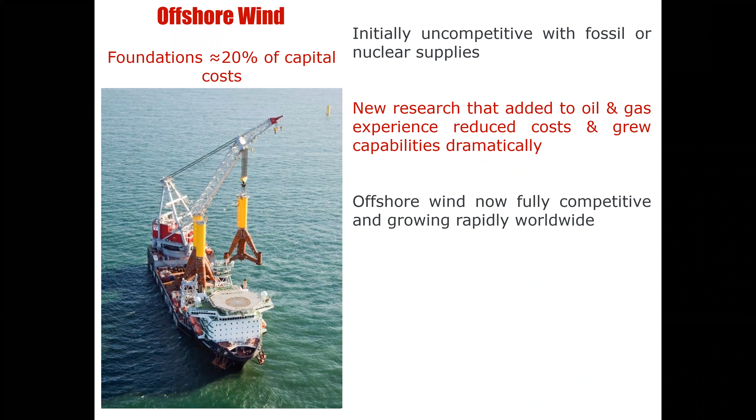Now, the UK has led the way on this in terms of market share. We have the largest capacity installed in the world, about 25% of the total, and that's allowed us to reduce our coal generation massively. And if you've been watching the news from Glasgow with COP26, you'll see this is a major achievement. The UK, which is almost built on coal, now only gets 1.7% of its electricity from coal, and the plan is to stop this completely within 3 years. And of course, this is very good for the environment.

Now, wind turbine foundations really depend principally on the geomaterials and the water depth and the ocean loading and where you are in the world with regard to regulation regime. We have in shallow depths many monopile foundations. As we go into deeper water, we have jacket foundations, miniature oil rigs. And as we go deeper still, we have floating structures. I believe at the moment the UK has the only operational floating wind farm, but they're likely to become much more common around the world in the years ahead.

So for monopiles, we get lateral loading. For jacket piles, they principally work in push-pull to take the moment supplied by the wind and waves. And in all cases, we're concerned with ultimate conditions and also initial loading response, which governs the cyclic behaviour, and that really depends on the small strain behaviour of the geomaterials present.

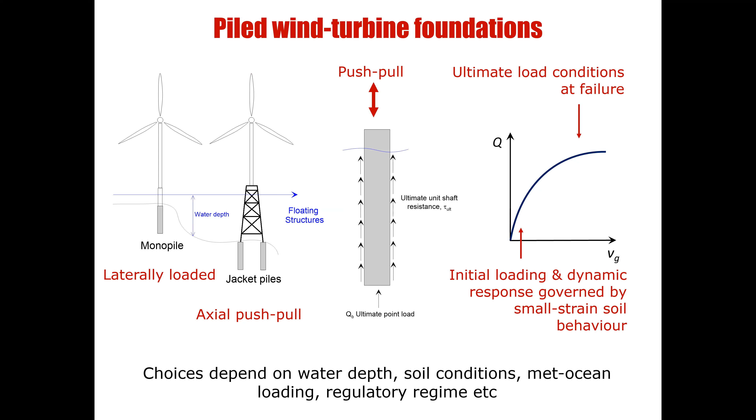How can we aid design as geotechnical engineers? Well, come up with new ways of calculating and predicting load displacement and ultimate capacity for offshore wind. We've done this by combining advanced element testing, numerical and physical modelling, and also field monitoring. And keeping in touch with what happens in the field with real wind farms has been very important to exploring the questions that are posed by field observations.

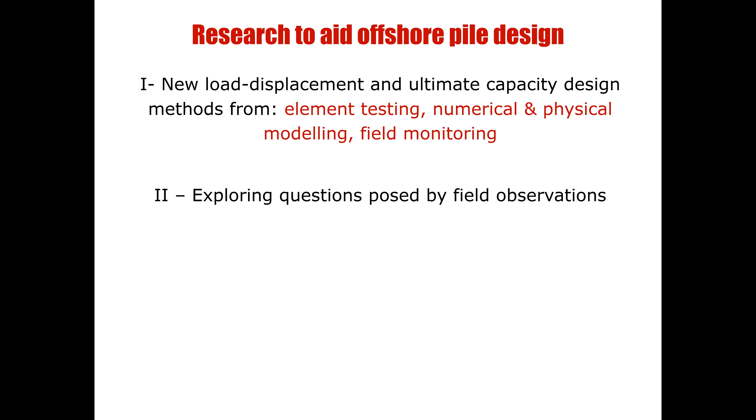So we have multiple challenges, and around the world I've been trying to meet these in Europe and now Asia, USA and elsewhere, hopefully Brazil. So we're going to talk first about monopiles and then move on to floating and finally jacket structures. With monopiles, their operational response is controlled by stiffness and verticality. The wind turbine operators say that you have to have certain parameters met to satisfy design. And this has been done with these low length diameter caissons quite successfully so far in very large wind farms in Northern Europe.

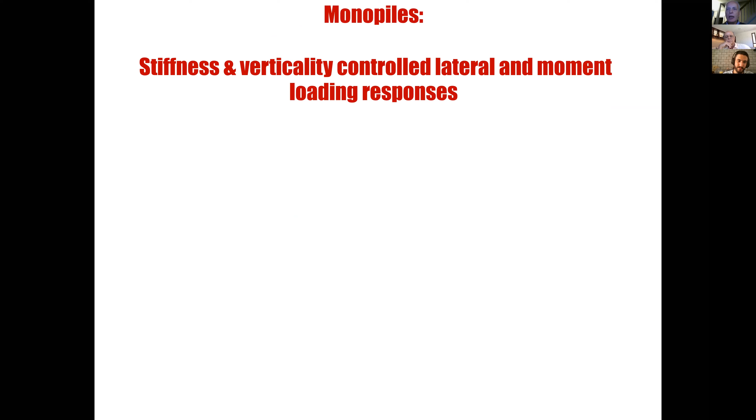What is found, though, is that the field monitoring of the frequency responses of these structures shows that the standard p-y methods that have been used to design, for example, offshore platforms for gas, lead to over-design, over-conservative design in the soils we have in Northern Europe. We saw the same thing, actually, with North Sea oil and gas platform piles, and I'll mention that later. So there's scope to do better engineering, better analysis, and so reduce costs and allow monopiles to go into deeper water and maybe with more challenging geomaterials.

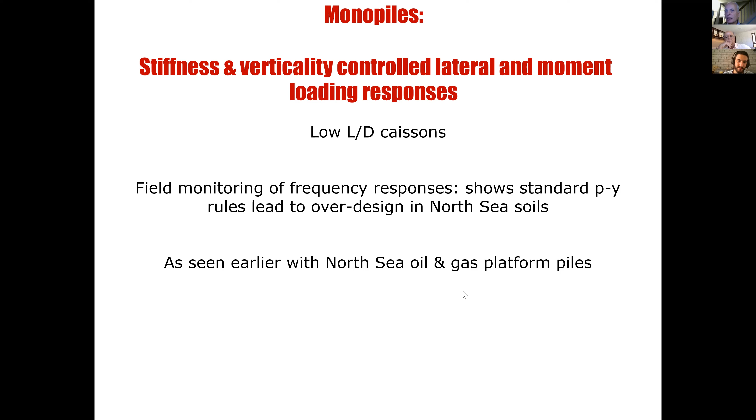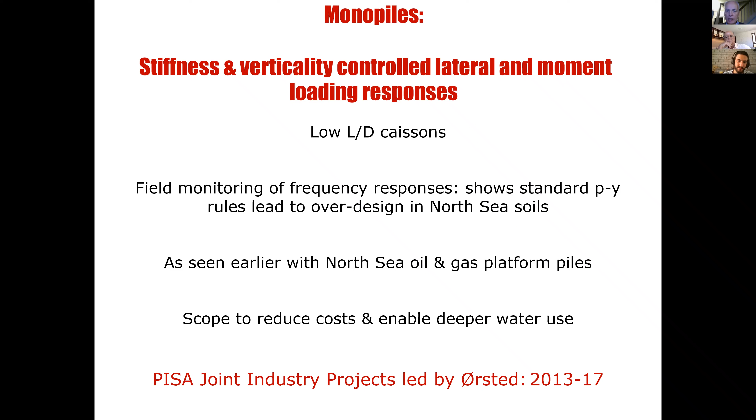Now, our work in this area was partly associated with the PISA project, which was led by Ørsted, the world's largest developer. And we spent about 5 years on this project, PISA 1 and PISA 2. Now, the PISA project was led by industry, but its academic work group, which set the scientific objective, was Oxford, Imperial College, and University College Dublin. And our approach was to come up with methods that were tuned to match the monopile length to diameter ratio, which is much smaller than that for conventional offshore oil and gas piles, to use the regional soils that we find in our area and do intensive testing on those, and also to recognize cyclic action.

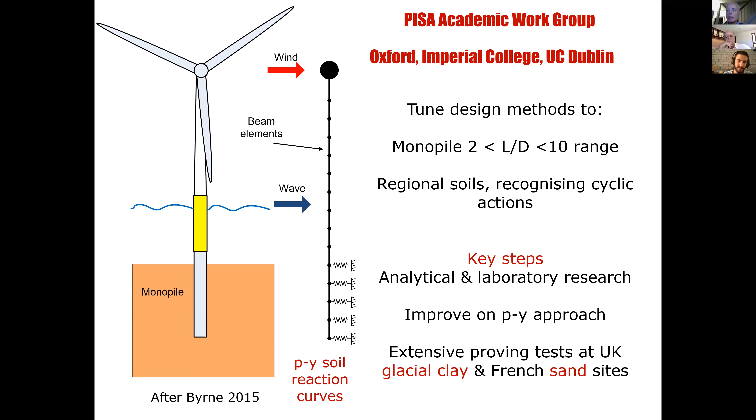So the key steps were starting off actually with numerical analysis and laboratory research. From there, we proposed an improvement on the p-y approach, and then we went to test that with extensive field tests on piles up to 2 meters diameter, at a UK glacial till site and a French sand site. So at each of these test sites, we installed 14 piles. They had 3 diameters, so we could look at scale effects, a range of geometries and wall thickness and so on. And we did both static testing to failure, as well as rate and cyclic tests. And we had lots of instruments on the piles and in the ground. We had comprehensive site investigations, including advanced seismic testing and CPTU testing, plus a lot of laboratory experiments too.

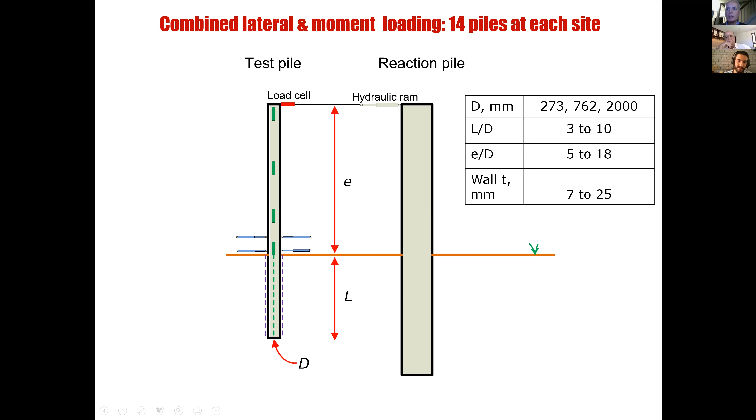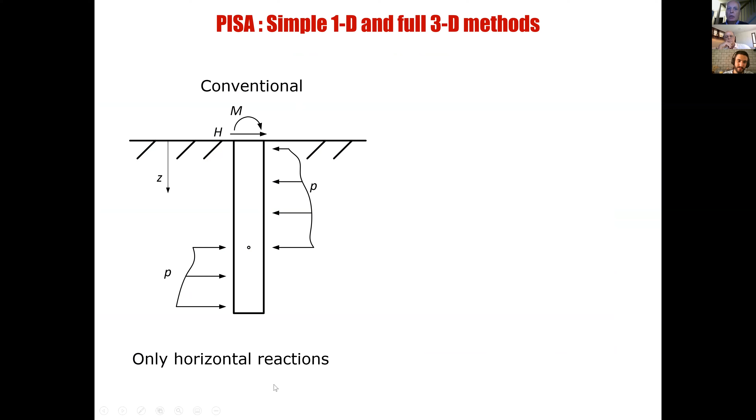Now, the conventional approach to monopile design is to use p-y curves, which provide only horizontal reactions. And the curves, as they're formulated, offer very little opportunity for capturing the details of your regional soils, and they say almost nothing about how to handle cyclic loading. So in PISA, we introduced not only horizontal reactions, but 3 other forms of reaction that contribute to the monopile behavior, which are particularly important with short monopiles. These extra components are distributed side shear, base shear, and base moment. And we calibrated these to advanced finite element models, which were themselves calibrated to stress path tests done in the laboratory. This was part of the work that I supervised, which was done state of the art. And this also recognizes the cyclic loading response.

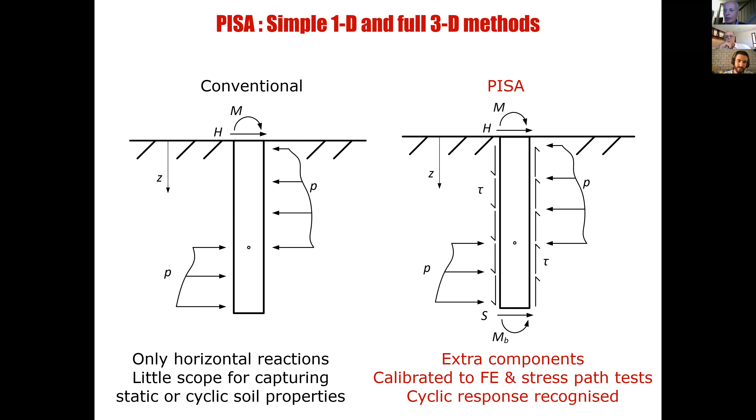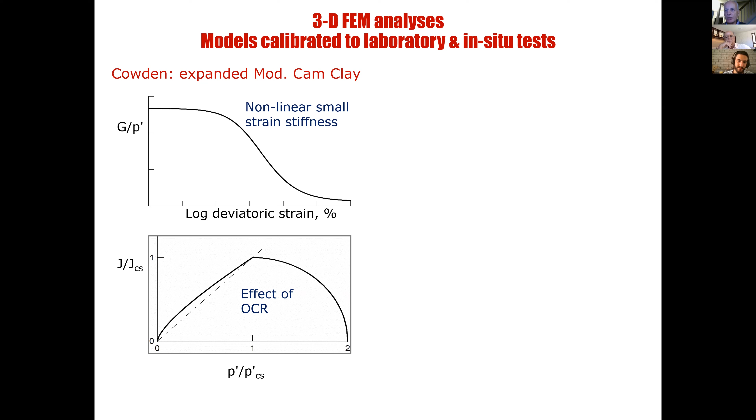So the numerical modeling was done at Imperial College. My colleague and actually former PhD student, Lidija Zdravković, now a famous professor herself. And here we used, for the clay site, an expanded version of Cam clay, which had a very nonlinear small strain stiffness formulation. It recognized the effect of overconsolidated conditions much more precisely than the usual Cam clay or modified Cam clay. And that's really important for the stiff clays that we encounter in the North Sea. And for the sand, we used a bounding surface plasticity model, and we had strength variations in the deviatoric plane, and we had a state-dependent response in the sand. And this work was led by Lidija Zdravković, David Taborda, David Potts, and myself from Imperial College. And that was one of our main contributions, along with the soil testing.

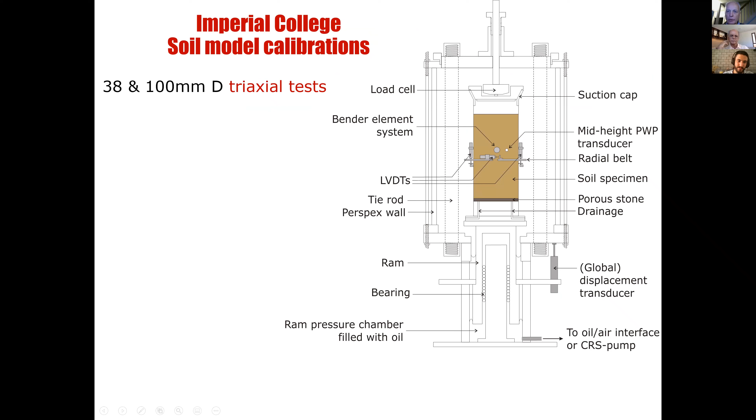And the soil testing was done at Imperial College in our laboratory with advanced equipment. We had 2 sizes of stress path apparatus, very high resolution local strain measurements. We could measure pore pressures at the mid-height of our specimens. We had dual axis bender element equipment. And we also looked at anisotropy with hollow cylinder apparatus. And we could make samples even of glacial till, which contains stones and so on. And this provided all of the parameters necessary to calibrate our models. And it also gave us extensions to go further than PISA to look at things like anisotropy, cyclic behavior, and strain rate dependency. Now, let's look at the importance of modeling the right soils.

In the North Sea, and actually I believe in many places around the world, we find 2 classes of soils, which I'm going to typify here by glacial Bolders Bank till, and Eocene marine London clay. And we're going to look at identical specimens in terms of depth and K0 values and very similar high OCRs. And we're going to look at their normalized stress strain and effective stress path behavior.

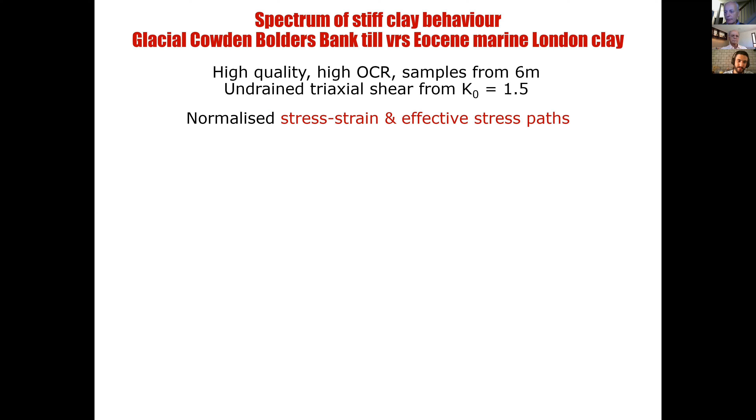So here we have stress strain normalized by initial mean effective stress plotted against axial strain. Now the Cowden till behaves like a critical state material and is ductile and reaches peak strength when it reaches its critical state at very large strains. The London clay, however, forms a shear band at modest strains and then reduces with a very brittle response to much lower strengths. So that's a very important difference.

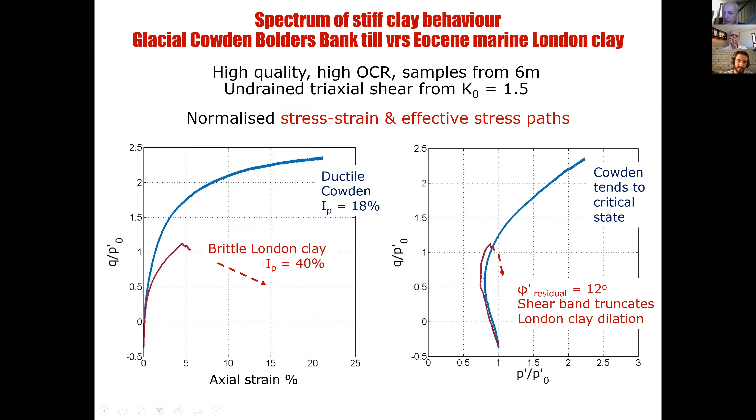If we have a look at this in effective stress space now, q, p', normalized by p'0, the Cowden till dilates as we'd expect for a critical state material, whereas the London clay bifurcates and forms a shear band. And we really need to distinguish these classes of behavior if we're going to model monopile foundations in a faithful way. We also find that the stiffness strain responses of the 2 geomaterials are very different.

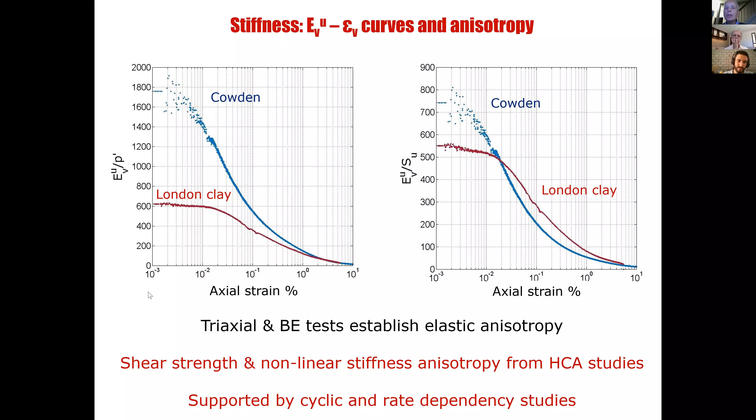So at the moment, for example, I'm involved in 2 major wind farms, one under construction, one under design, where we've applied this approach with site-specific advanced testing and site-specific advanced modeling. And these are multi-billion dollar wind farms at gigawatt scale. So it's entirely possible to do this.

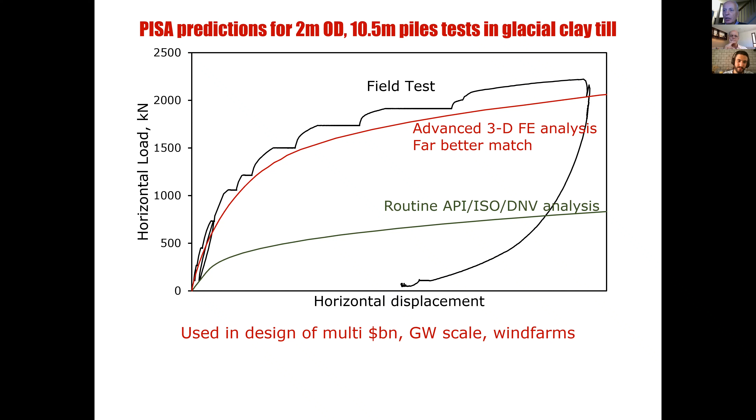And there's further work on the cyclic loading. I'm involved in a project with our friends in China at Zhejiang University in East China, Jiaotong University, whereas my colleagues in Oxford are working with the PICASO project. The PICASO one, which doesn't involve us, involves large tests at the Cowden site and another site, combined with model testing and theoretical modeling. And the idea here is to be able to deal with cyclic modeling for both clay and sand, with pseudo-random and also regular cyclic loading. And there are new models for multi-directional cases and field tests too, I believe. And these are on very large piles, up to 2.5 meters diameter. We have other work going on ourselves with both theoretical approaches and field testing, some of which I'll mention shortly.

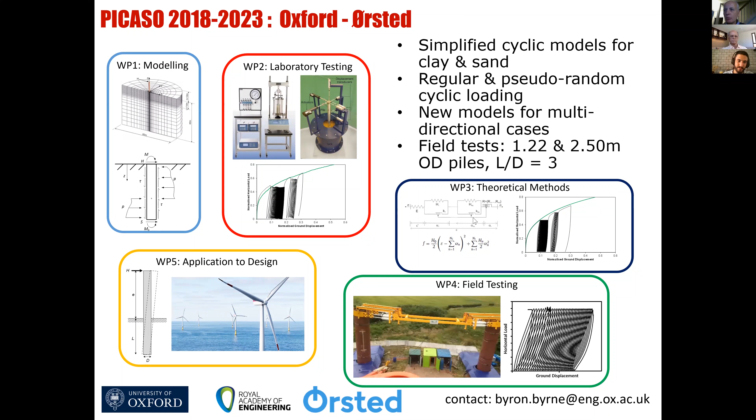Now, the big new challenges are to go from shallow water monopiles into jacket structures and into floating platforms in deeper water. Now, the first oil production platform that employed a floating construction and was anchored to the seabed was the Hutton tension leg platform. And this is now nearly 40 years ago. And I worked on this project and we instrumented these foundations with actually 30 micron resolution in the seabed. And we could see exactly what was happening with the piles at that time.

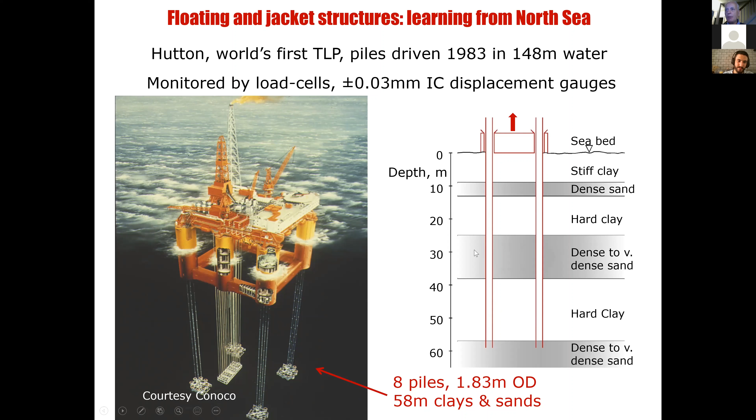And what we found was that when we compared group load on the piles with movement uplift, the conventional analysis, the PY, actually for this case, TZ analysis, but it's the same for PY too, came as shown in green. Our field observations were as shown in blue, and analyses that we made based on stress path testing conducted actually as part of my PhD, and numerical analyses run with my colleague David Potts, showed much better agreement. The standard industry rules are about 4 times too soft. And we found the same with jacket structures, such as Magnus, which at the time I think was the biggest steel structure offshore in the world.

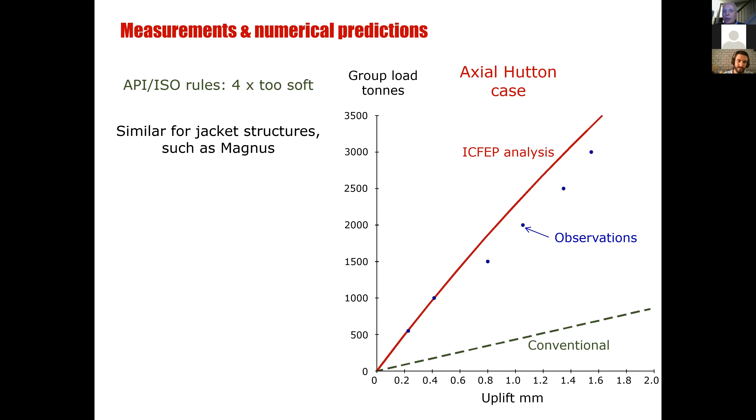So this small strain testing from the lab, combined with nonlinear finite element analysis, gave us very nice predictions. And we've been able to apply that in the PISA project and in many other projects onshore, offshore around the world. But our friends in the offshore industry told us that wasn't really the problem. They told us that they didn't really care too much about load deformation. What really worried them was axial capacity.

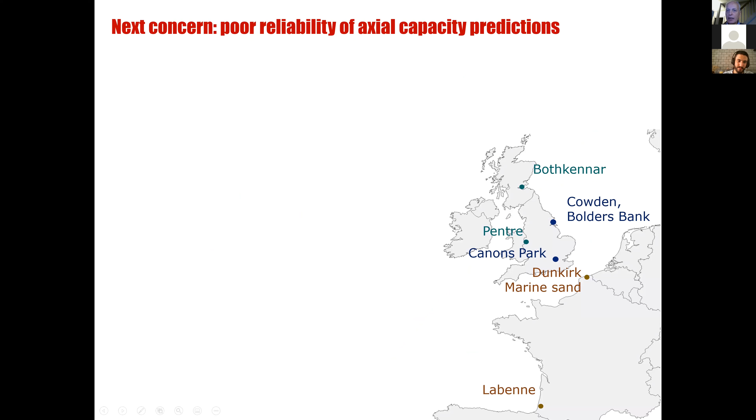So in the 1980s, I set about a research program which went on for more than 15 years, where we addressed the very poor reliability of offshore axial pile design methods. And we noted that at the time, it was considered unfeasible to do full-scale tests offshore. There were some onshore tests on quite big piles, and we took part in those programs, but we went with still smaller piles, which we instrumented very carefully, and we tested these at 6 sites in the UK and France, with clays with high and low plasticity index and OCR, loose and dense sands, and covering this whole range in 3 PhDs, which I'm proud to say all won prizes for the excellent students involved.

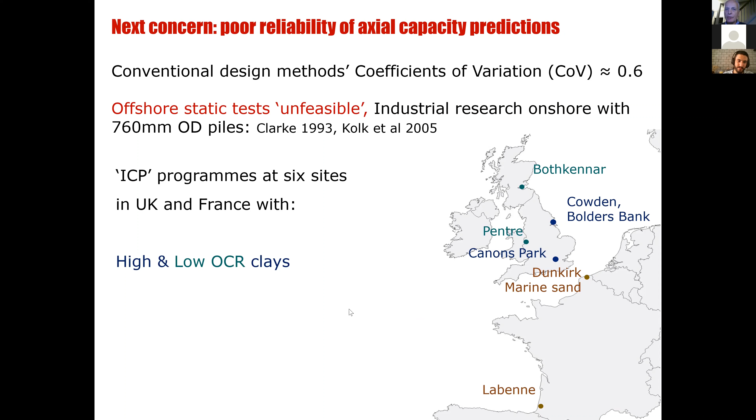Now, the key tool here was our instrumented pile. We could measure with this instrumented pile local shear stresses and radial stresses on the pile surface and pore water pressures, and we could do this during installation, equalization, and static and cyclic loading. What we found was that there was a big missing parameter in pile design methods, and that's the relative depth of the pile tip below any point in question. It wasn't there in any of the design methods, but we introduced it, and it makes a massive difference and explains many anomalies. We came up with new pile design methods, which we call the ICP approach.

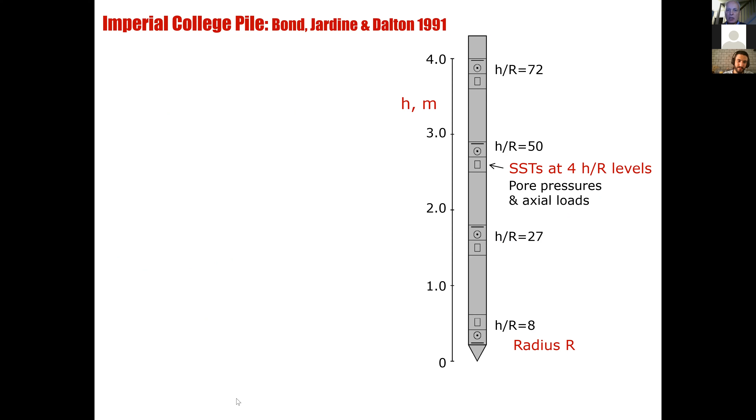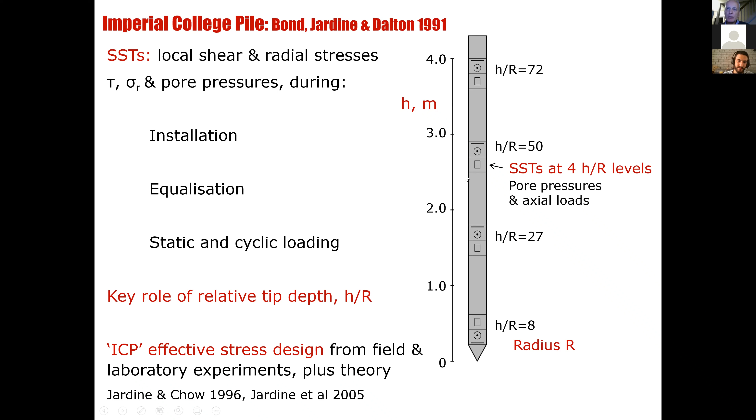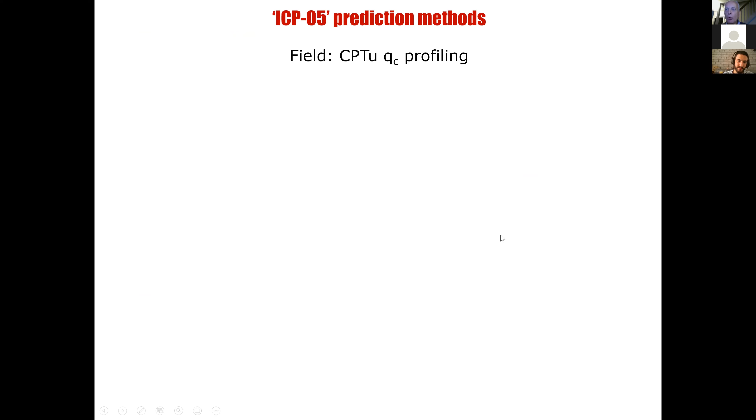We put these first in the mid-90s and updated them about a decade later. We rely critically on high-quality site investigations, with CPTU profiling in the field. In the laboratory, we measure interface shear angles and special tests. We measure OCR for clays and sensitivity, and we link the base resistance directly to cone resistance. Shaft failure, we deal with in terms of effective stress, and we have different expressions for sands and clays. In sands, it's linked principally to the cone, and in clays, it can be linked to the cone, but we normally use laboratory tests. We have a means of using the same expression to cover both closed and open-ended piles,

and we note that as we load a pile to failure, changes occur in the radial effective stresses, which imply important scale effects. The dilatant term here for sands, for example, is inversely proportional to pile radius. So it can dominate the response of a small model pile, but have much less influence on a large offshore pile. And this depends as well on the roughness of the pile.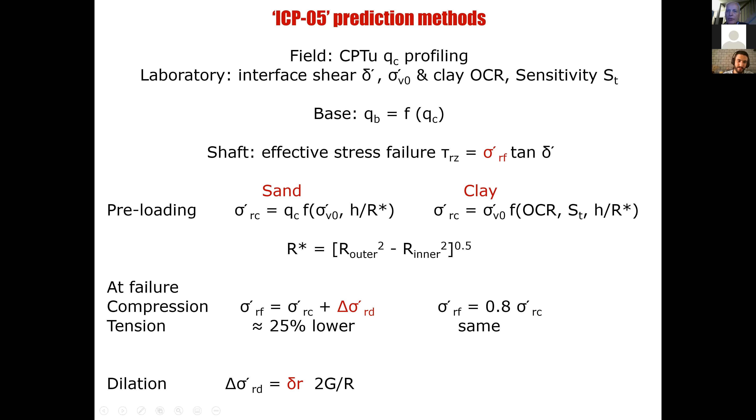Now, we've carried on checking the reliability of the design methods, and recently we did this with colleagues in China, and we gathered data from around the world, including tests in Brazil. And all of these tests met our quality indices for the pile tests and for the site investigations. And we could look at the relative reliability of a whole series of different approaches that might be used in practice. And the ideal is to get a mean between calculated and measured close to unity, and to have a COV as small as possible. And I'm happy to say that the ICP procedure is about the best one. You might argue the UWA one is comparable, or some people might say better, but they're very similar. They're derived from the same basis. Whereas the routine API method has bias and a much worse COV.

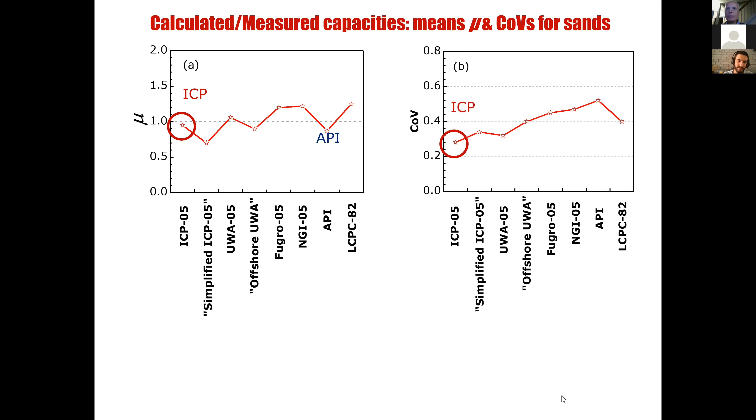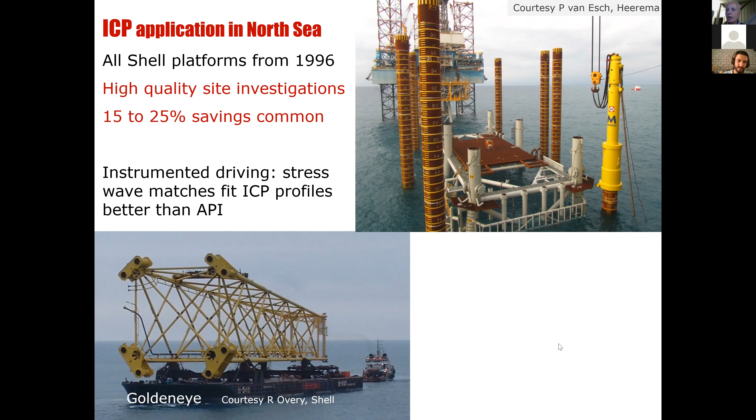So this allows us in the North Sea to tune our methods to our soils and actually have both better economy and more reliability. And this has encouraged widespread application around the world and a move towards lower L/D piles. So Shell in the North Sea applied this for all their platforms from the mid-90s onwards, and typically one can get 15 to 25% savings in the North Sea. We had instrumented pile driving data that demonstrated a good fit with the ICP approach. This is published by Shell, and Shell also showed how this approach led to considerable economy and allowed marginal projects to proceed that would otherwise be halted. And this approach has now been applied widely in the North Sea to big wind farms with more than 100 large turbines.

However, there still remain some research questions to be answered. One of these is the impact of age, pile age, and cyclic loading. So we conducted new research at field scale in France to look at these two phenomena with industrial scale piles.

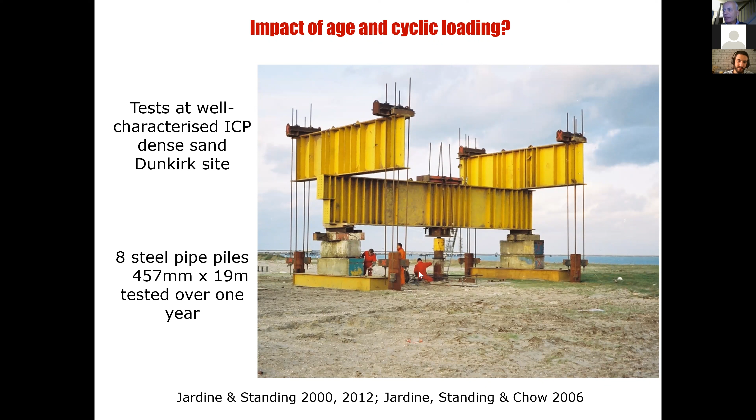The first thing we found is that tension capacity against load displacement here depended powerfully on age after driving. And again, this was unanticipated. You don't find it in the textbooks, but it's enormous and important. And this has been confirmed by work by our colleagues in Ireland and in Norway. But a worry is that this will depend on scale.

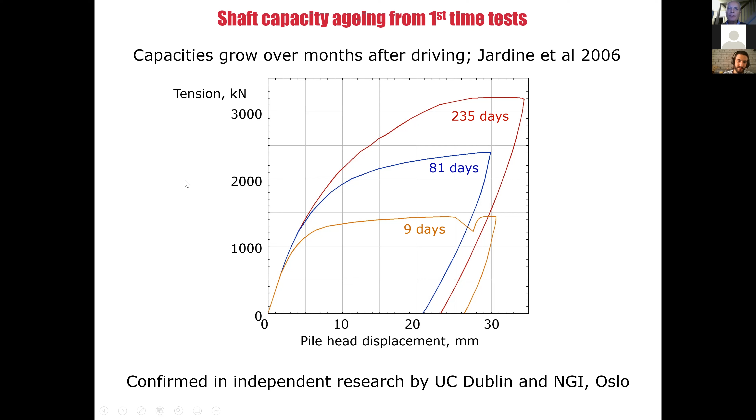And so with our colleagues in Ireland, Norway, and France, we conducted tests with 51 micropiles at 3 sites, and we showed that there is a dependency of scale and that corrosion reactions are crucially important. And we're now checking what happens at offshore scale through a project called the PAGE Joint Industry Project. This is now completed. We're presenting our results to the sponsors, and we hope to publish this very soon with some very interesting and new results.

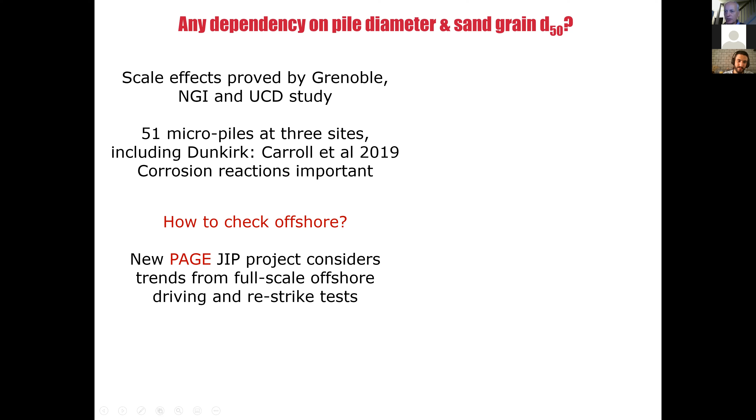And we included in earlier publications checks on aging, for example, at this site in Germany on large-scale piles that we wrote up about 6 years ago now. So an important point to note here is that with big wind farms, because the foundations are so expensive, it is now becoming feasible to do full-scale tests offshore and do this economically and get economic benefits from it at particular sites.

And testing that we've been involved with at full scale offshore includes cyclic loading experiments. But 20 years ago, we couldn't do that. So we went to our site in Dunkirk and we explored cyclic loading in sands, and we've done this also in clays elsewhere. Now, some colleagues told us, you won't get any cyclic loading response in sands because you won't be able to generate any pore pressures with the pile scales you have and with the cyclic loading frequencies you have. This turned out to be wrong.

We could get either unstable, stable, or fully metastable responses, depending on the combinations of the number of cycles, the cyclic amplitude, and the mean load normalized by tension capacity. So despite drained pore pressures, here's an example on a 19-meter long pile where for the first few hours it was cycling quite stably, and then we could get a runaway cyclic failure with a 16% capacity loss in this case.

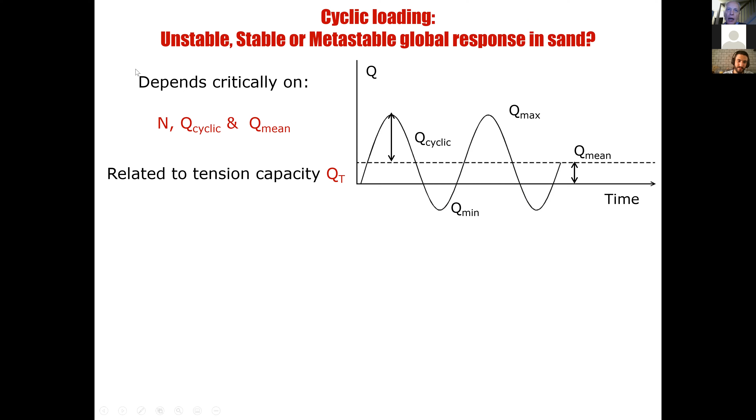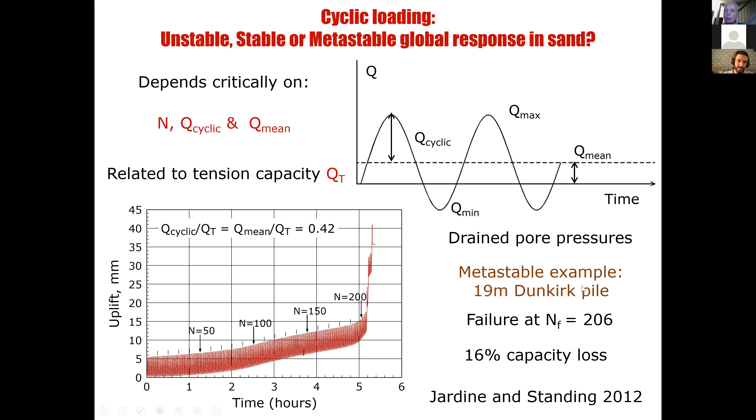So putting together a total of 14 tests, we could draw up a cyclic stability diagram from our field experiments that distinguished unstable regions of behavior with rapid degradation to stable regions of behavior where we could cycle, it seemed, forever without a problem, and metastable areas where a certain number of cycles caused very little damage, but large numbers of cycles would ultimately lead to failure. Now, in looking at this, there's a nice result. It's empirical. How can we understand what's going on to a local scale?

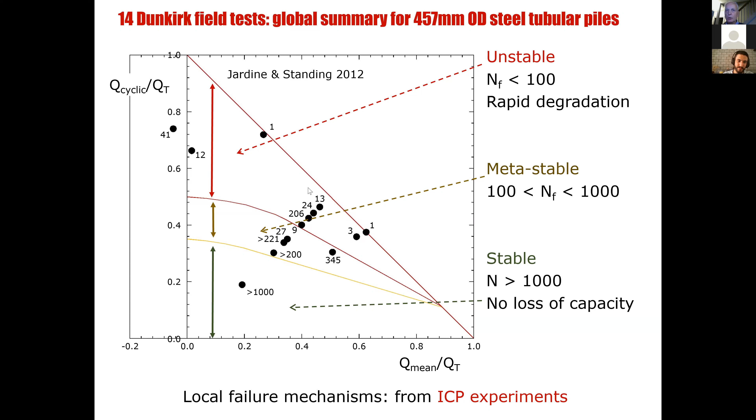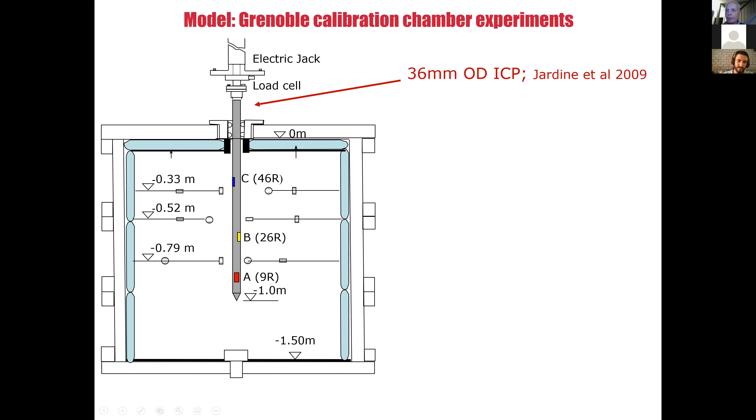Well, to do this, we've gone for model testing in the laboratory. In this case, in France, in Grenoble, we developed a miniature version of our ICP pile. We put this into a calibration chamber containing many, many instruments. It's a CPT-sized probe, and we tried to replicate the conditions in our field tests with about 40 stress sensors. And what we were able to establish is, for the first time, a good idea about the stress regime, not only on the pile surface, but in the sand mass around the pile. And this provides a benchmark for numerical modeling of the problem that is proving to be very informative.

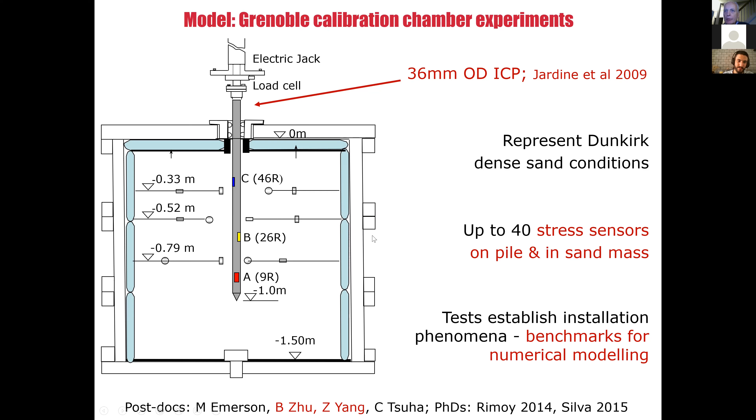They radiate away with radial distance out, with vertical distance below the pile tip, and with vertical distance above the pile tip. And these contouring regimes showed us how the pile installation pre-cycles and preloads a pile shaft and conditions it to give you a much better response to cyclic loading than, for example, in a bored pile. Bored piles fall down under cyclic loading far more easily because they don't involve these conditioning stages.

So we were able with this work to test emerging methods of analysis. We started off working with colleagues at Sydney University with an ALE technique with grain fracture modeling. We went on to do more work, which is similar, but with more advanced soil models with our colleagues in China. And we've done it with discrete element modeling at Imperial College too. So all of these techniques are showing us similar answers.

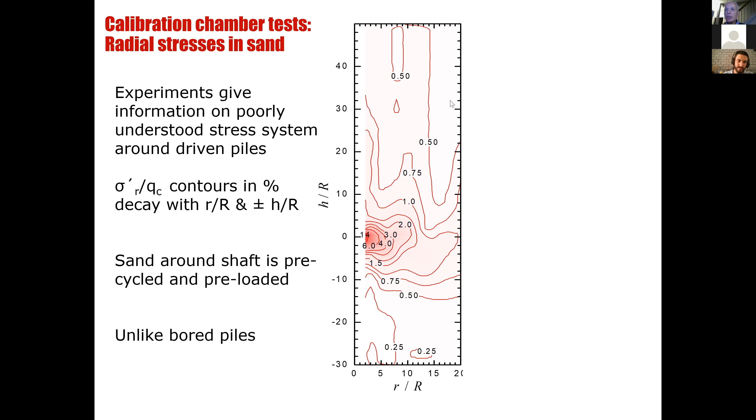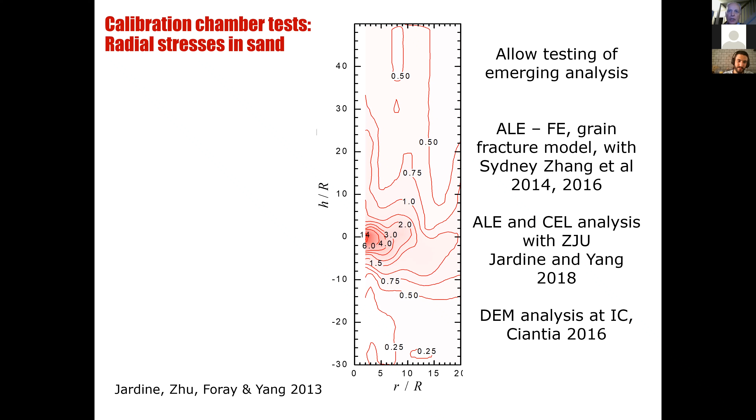We're able now to recover base capacity as a function of depth, for example, which used to be impossible to do theoretically. We can capture the grain breakage that occurs beneath the pile tip, and we can match the breakage contours that we measure experimentally with those that we get from theoretical calculations. We can also pick up the radial stresses and show how they vary with radius from the pile shaft as a function of position above the pile tip.

And we found this fascinating trend that the stresses are at a maximum some distance from the pile tip rather than on the pile shaft itself. And we get this by all of these methods of analysis, and it provides us with one of the key components for the pile aging that I showed you earlier.

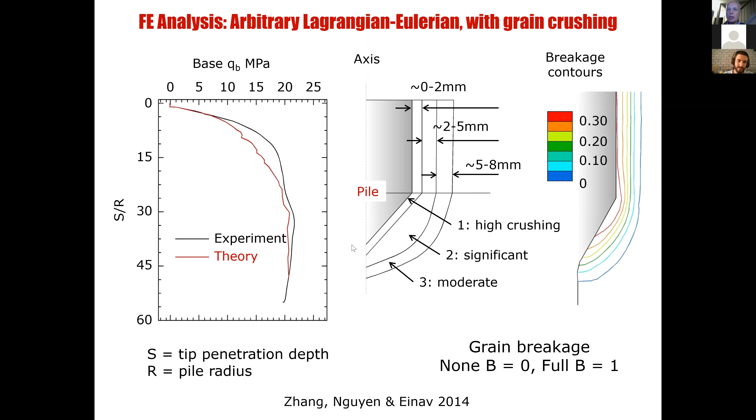We're able to pick up also the patterns of strain, and recently we've shown that we can match also digital image correlation experiments done at Purdue University, where they've picked up the strain fields rather than the stress fields. And we can match pretty well through these emerging numerical analyses. Now, the next big challenge is to go from closed-ended piles to open tubular piles. And there are big challenges there, but that is the next task.

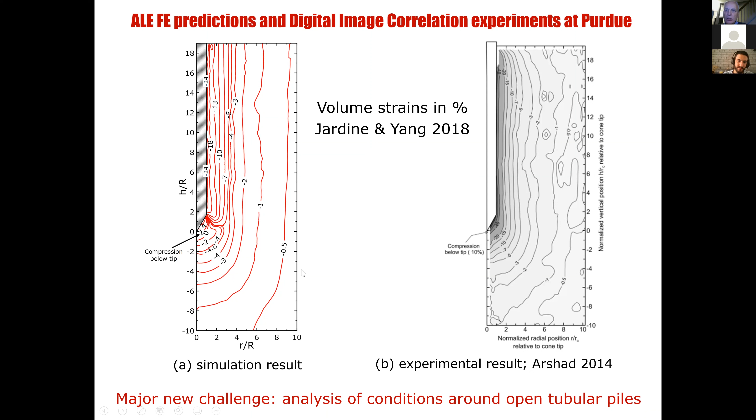Coming back to cyclic loading, with our instrumented piles, we could see what happens locally on the pile shaft as we have stable or unstable cycling. In stable cycling, shear stresses locally, radial stresses locally, our instrument readings stay in tight bunches over thousands of cycles with no movement, well within the interface failure envelope defined from interface shear tests.

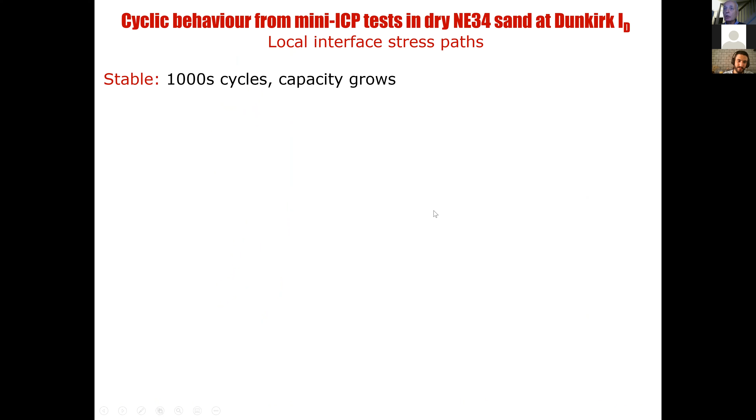Under unstable conditions, despite this being dry sand, we have paths that look like liquefaction analysis. And we can see the so-called butterfly wings in the effective stress paths that are constrained by the interface shear envelopes and migrate towards the origin with a rapid collapse. In between, we have cases where there are slow drifts that we can capture over time and then try to model. How can we model this?

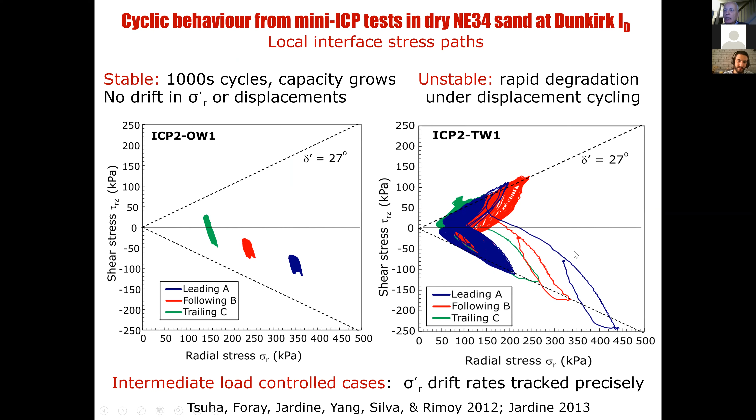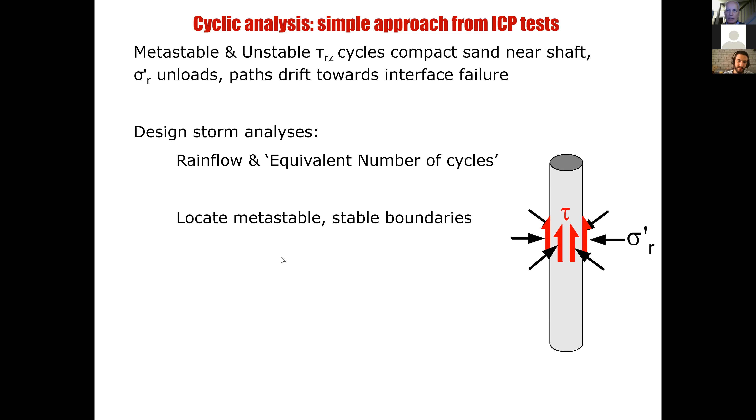Well, the key is to see what's happening to the radial effective stresses on the side of the pile as we cycle. And once we can capture that, we can go through to a range of techniques to try to pick up the impact on the field on piles in a wind farm. If we can locate those metastable and stable boundaries by calculation, relating the drifts in radial effective stress to the cyclic loading, then basing those on site-specific lab tests, then we can do site-specific design.

These element tests have to capture those preconditioning stages that I talked about, and we can do this because, as we remember, bored piles are far more susceptible to cycling in sand than driven piles. So here are some experiments. These were conducted by one of my PhD students who now works for Ørsted. These are triaxial tests, but we can also do them in the hollow cylinder or simple shear.

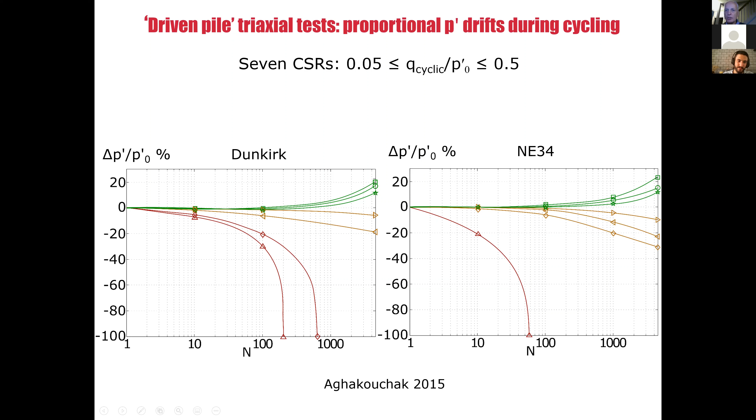We've got 7 different cyclic stress ratios with the preconditioning steps applied. And for 3 of these ratios, actually the effective stresses improve, they don't decline. For 2 of them, we have rapid collapse, and for 2 more, we have metastable responses, with effective stresses dropping by maybe 20% in, let's say, 4,000 cycles here. And we found the same for Dunkirk sand and also NE34 sand, very similar responses.

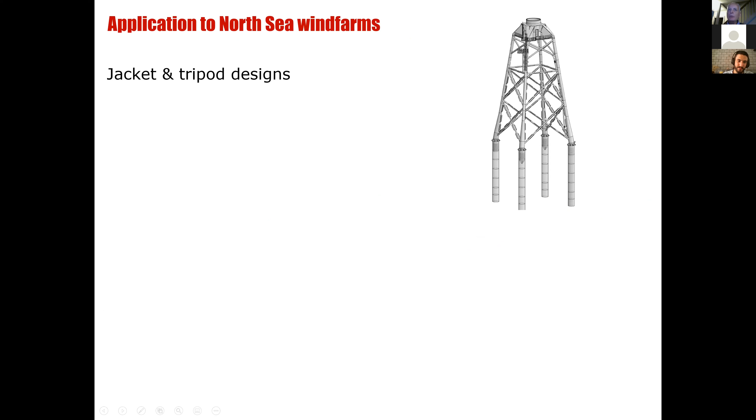And we can apply this to North Sea wind farms with jacket or tripod designs. Here's one off the UK coastline, East Anglia One, with 102 large jacket structures. And this is written up with our friends from Fugro. Here's another one offshore Germany, which we wrote up with others with 40 large tripods. So we can do this for sands and clays, and we have a good methodology that works in practice. And this wind farm has been operating now for a good number of years without any difficulties.

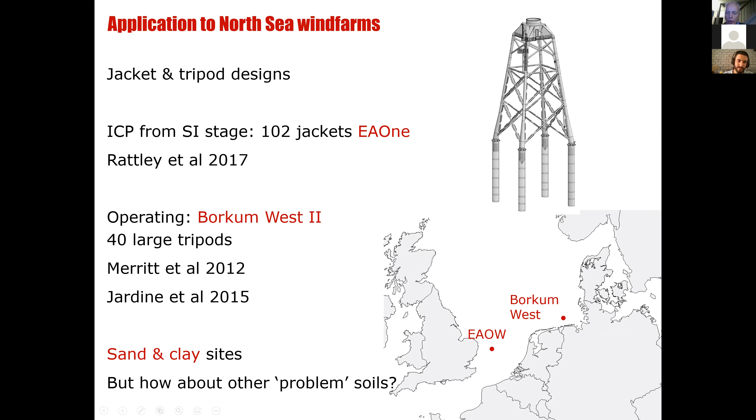Now, there are other soils which are harder to characterize. And one we meet in the North Sea is chalk. It's a calcareous soil. It's a calcareous silt that forms a very weak rock. And there are big problems with this because the chalk collapses under impact and it's very susceptible to cyclic damage.

And chalk is found over a very large area, not always at foundation depth, but it's under France, bits of Germany, Denmark, and so on. And driving in it has caused major uncertainty for tens of big projects.

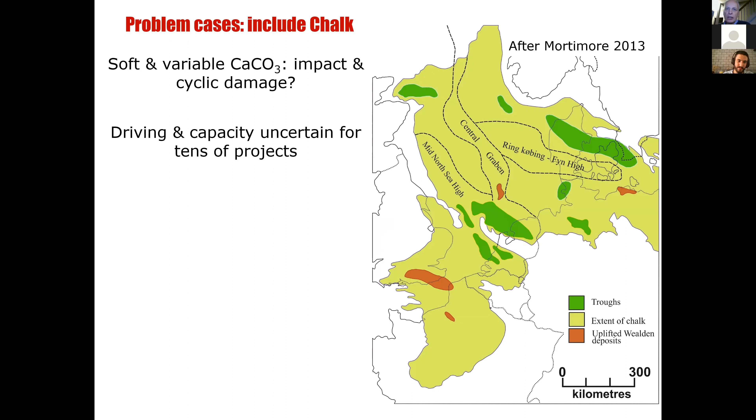So we were involved with a company called Iberdrola, a Spanish company, to do work in the German Baltic, and we helped them to design full-scale field tests out here in the German Baltic in a wind farm called Wikinger, which is German for Viking.

And we carried on our own support testing at a site in the UK called St. Nicholas. And we did testing there with our ICP, and we've also done testing at full scale in the field. This is out in the German Baltic.

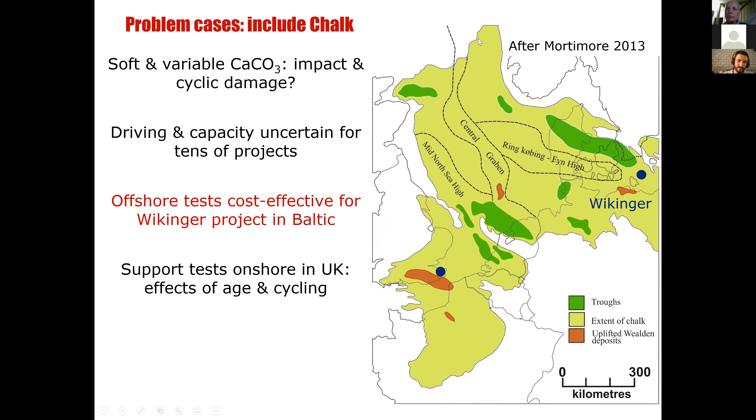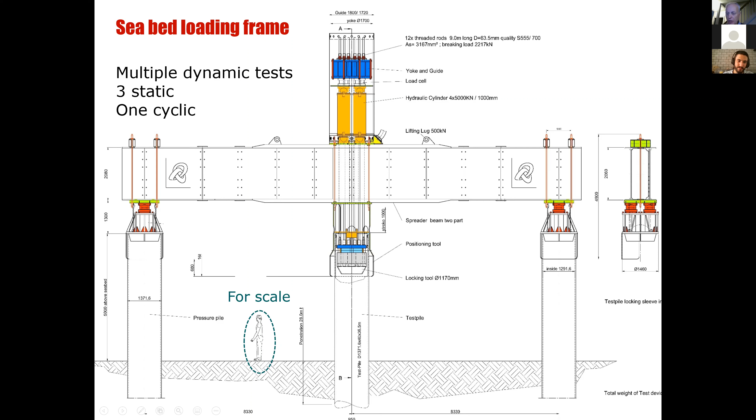full scale. We've gone on with a program for which I'm the principal investigator called ALPACA. And tomorrow we have a new test to be done at this site on a large pile undergoing lateral loading to simulate monopile behaviour as well as jacket pile behaviour. But in this case, Oxford have joined us, but we're in the lead for this one. And we have a large group of industrial sponsors and government funding.

And we've installed 42 piles with a wide range of scales, and we've used a range of pile materials too. We're doing dynamic, monotonic, and cyclic testing, axial and lateral, with a whole range of pile ages as well. And what's coming from this is data that we're modeling also through numerical analysis through an associated project called ALPHA, which is run at Imperial College.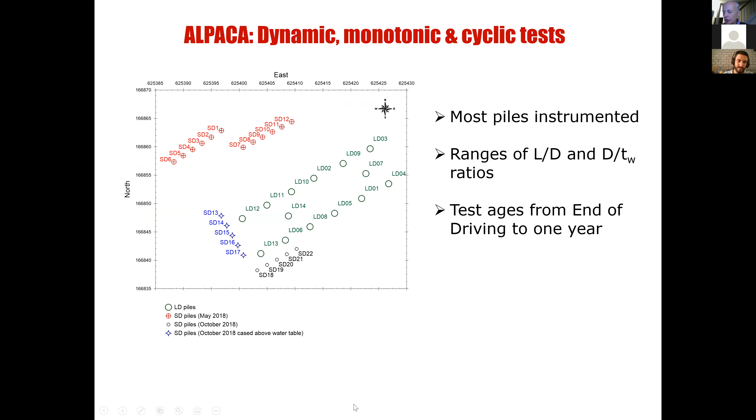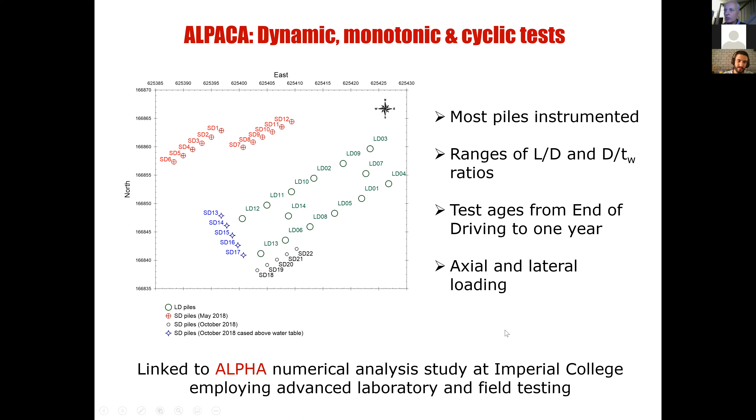And there's a lot of advanced laboratory testing, which again, I've directed in our laboratory. We have very good data from in situ testing, showing cone resistances up at about 20 megapascals. We're getting geophysical data too. We're doing soil to steel corrosion studies, and we're looking at the role of the groundwater as being particularly important. So we had very nice wireline rotary drilling, we have block sampling, and we have a big range of in situ tests as well, plus an awful lot of laboratory testing.

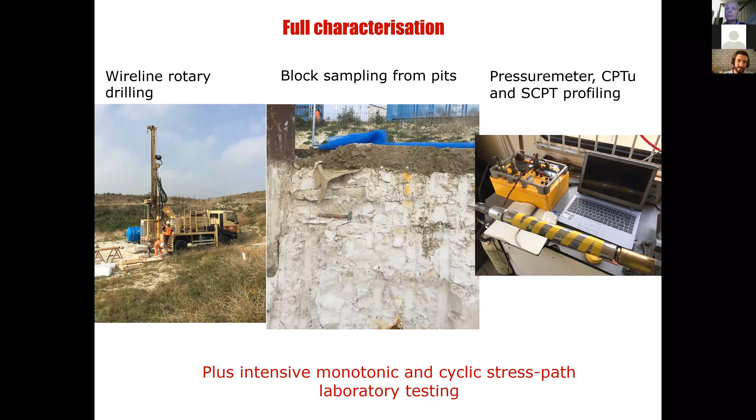We have 3 papers that have just been accepted into Geotechnique that describe the laboratory testing so far, and we have 1 more paper to come. So with the chalk, we feel now that we've got new design methods that are more reliable, and they differ greatly from the conventional methods that have been used up to this point. They allow much more economic foundations, and we believe more reliable performance.

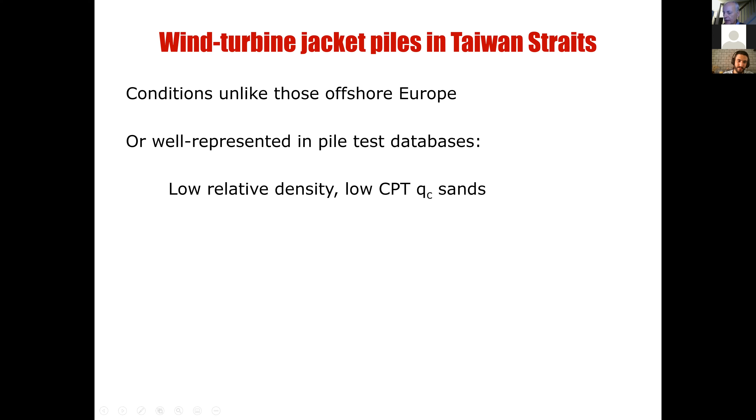Now, there are many areas around the world where wind power is now becoming important. One is Taiwan and the China coastline, where the soil conditions are very different to those in Northern Europe. They're not well represented in the pile test databases either. We have very low relative density sands with very low cone resistances. We have high silt contents in clays and sands, and we have significant mica contents.

And in these regions, rather than North Sea storms, we have earthquake loading and typhoon loading. And we need also to bring the regional site investigation practice to be able to undertake similar testing to that we can do routinely in the North Sea. So developers here have choices. They can either take existing methods and be consciously conservative, or they can do large-scale representative tests offshore or onshore.

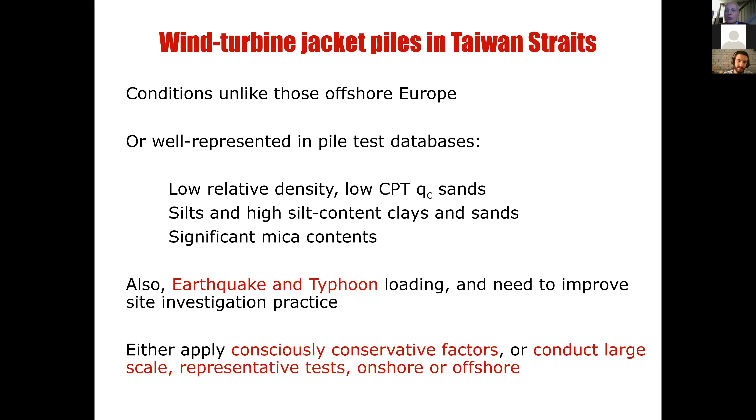And we've been involved in liaising with 2 of these studies. And here's one that was done by Ørsted. This ship came all the way from the German Baltic and this is the pile test equipment, very large scale, expensive testing, but it's really worth it. On a big wind farm, you can get your money back from this kind of testing. And it's been possible to do monotonic testing, axial and lateral, and cyclic testing too. And this is allowing checks on the design and a way forward to optimizing foundation behavior.

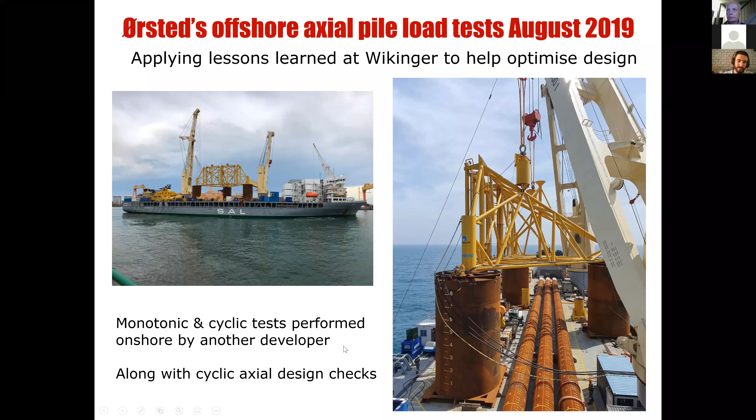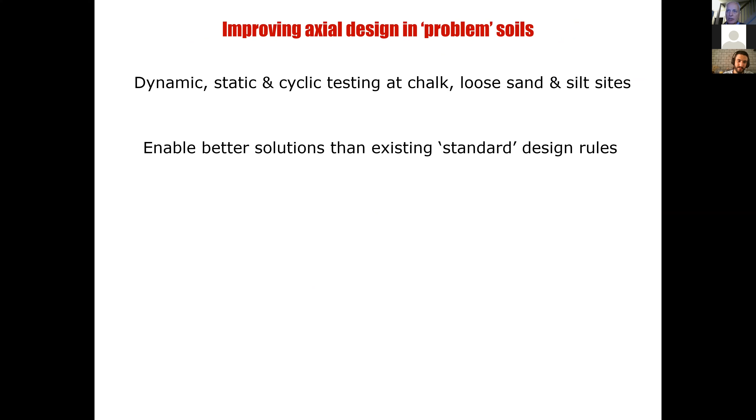So, looking at so-called problem soils, we've been able to look at the calcareous chalk, loose sands, silt sands, and silty sites. And we've been able in each case to improve on existing standard design rules, allow for new methods to come through that can be refined by ongoing research, and we can apply these to other cases. So, for example, we're working also in rock, offshore France, and also earlier offshore Scotland.

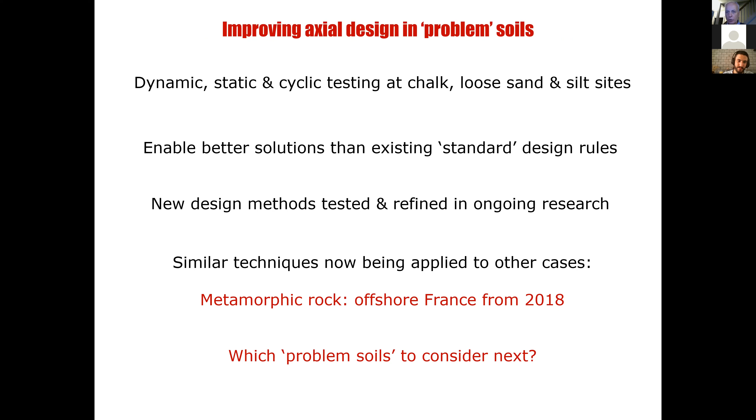And of course, there'll be further problem soils to consider, maybe offshore Brazil, and it'll be very interesting to see how we can apply the same principles of combining high quality lab testing, high quality numerical analysis, and field observations to do better design. So to summarize, what I've described to you this evening is a long-term program of collaborative research into driven pile axial stiffness, capacity, aging, cyclic and lateral loading, and problem soils.

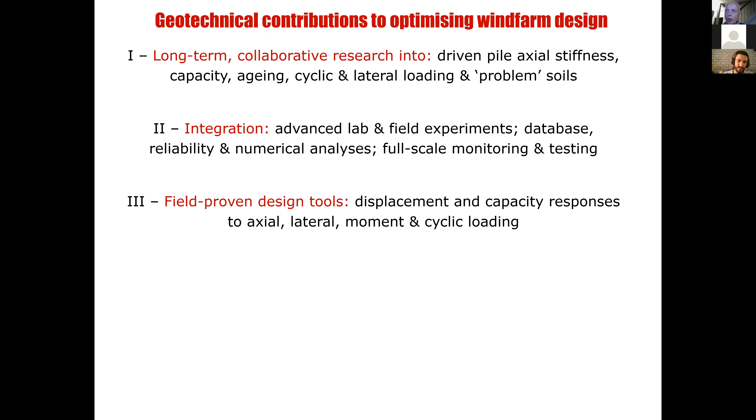We've integrated advanced laboratory and field experiments with database studies, reliability, numerical analysis, full-scale monitoring and testing. We've come up with field-proven design tools for the displacement and capacity responses to a range of different moment loading, lateral loading, and axial loading styles. Now, this has been one of the components that's allowed us to bring down the wind costs in the UK by 2/3 over the last 5 years.

Of course, there are other advances in turbines and in the structures and in many, many factors. But now in the UK, our CO2 emissions are half of their 1990 peak. And if we carry on developing wind farms at the rate we're doing now, we'll be able to have very much less CO2 than that. And I think the UK is aiming for net zero by 2050.

So there are benefits from this research in foundations. They're probably worth about $200 million a year in the UK at the moment. And the European investment rate for offshore wind is something like 40 billion per year. And we think we can probably save maybe 3% of that through the geotechnical research that I've described this evening.